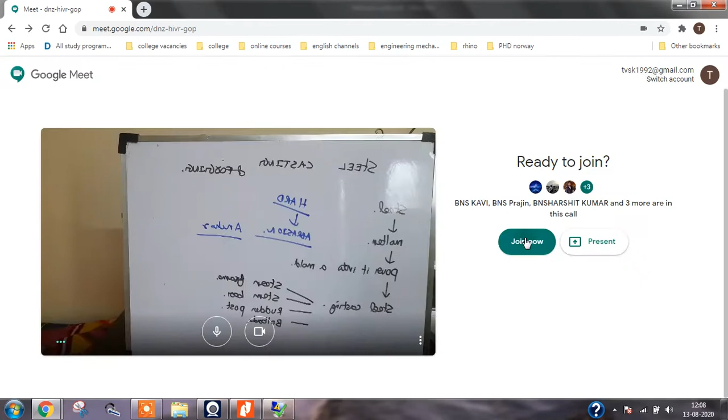Sir is not there. Ah, sir has come. Sorry, my computer got shut down.

Hello, the mic is off. Yes sir, okay, so my computer got shut down. That's fine, we'll continue.

One more place where we use steel casting is where the shape is complex, like the bulbous bow region or the aft end of the ship. The shape will be very complex like this, so you cannot go for normal plating. If you use normal plating, you have to take that plate for a bending machine, and if you bend the plate too much, a lot of internal stresses develop. So to avoid that, we go for casting.

So what is the difference between casting and forging? In casting, the metal is molten and it is poured into a mold, then it is cooled. In forging, we are doing hot forging work, we use a hammer to make it into shape.

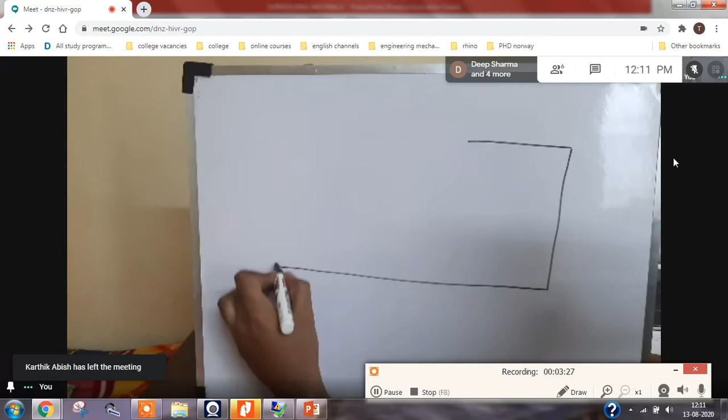In some places in the ship, the material needs to be very hard. For example, take a bulk carrier - this is a bulk carrier and this is the hatch opening. The grab crane is going to come down into this, say the cargo is here, this is the cargo. The grab crane is going to come and rub on the surface.

This plate is your inner bottom plate, inner bottom plating of the ship. The grab crane is going to come and take the cargo from here. The grab crane is made of metal steel, so it comes and rubs on the inner bottom plating. One or two times is fine, but if it happens 100 or 200 times, the material thickness keeps decreasing due to abrasion between the grab crane and the inner bottom. After some time, a dent or hole may form in this.

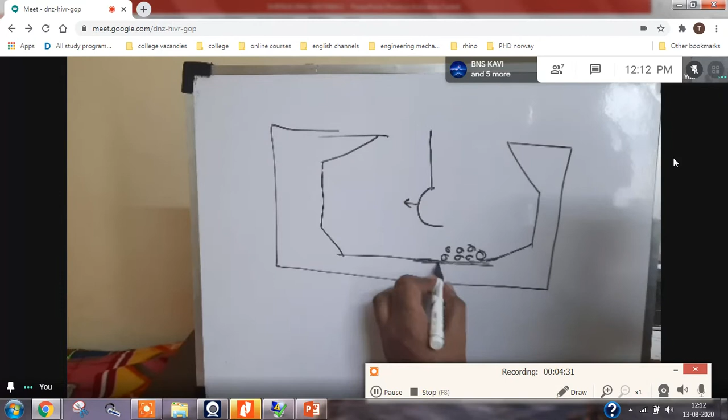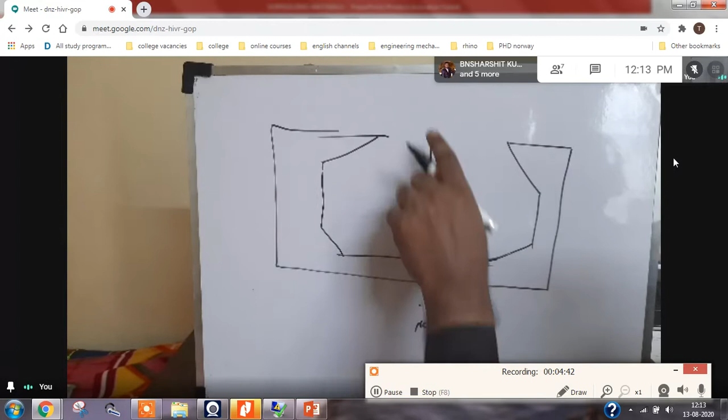To avoid that, we need to use a steel with good hardness, so we go for carbon manganese steel. Particularly for bulk carriers in the bottom, we go for carbon manganese steel. What is the disadvantage of carbon manganese steel? It is very prone to corrosion and the toughness is less, but the hardness and strength are very good. We increase the carbon content and use it in these places. So wherever you need hardness, we have to use carbon manganese steel with more carbon content.

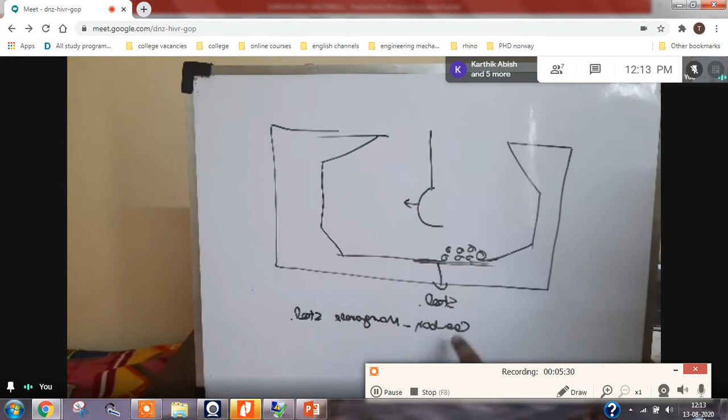So you have to think about which part of the ship undergoes which kind of stress. Based on the stress, if it is tensile or compressive stress, you go for high tensile steel. If it is going to undergo abrasion, you go for hardened steel, meaning steel with more carbon content. Clear?

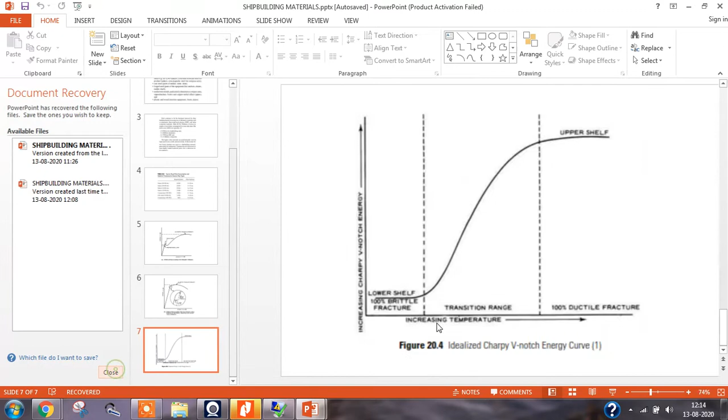Now there is one more topic - we'll go into the testing of steels. Before that, I'll give some more examples of where these steel materials are used.

If we take stainless steels - stainless steels are very costly because the chromium content in stainless steel starts from around 15% to 30%. The chromium content is very high, and the price of chromium is very high compared to steel and other metals, so the price of stainless steel is more. So what we do is we don't use it in a big structure like a ship. Even though it has good corrosion resistance property, we cannot use it in ships because the price is very high.

So what we do is we take a normal mild steel plate, and on top of that, we coat it with stainless steel. This is stainless steel coating.

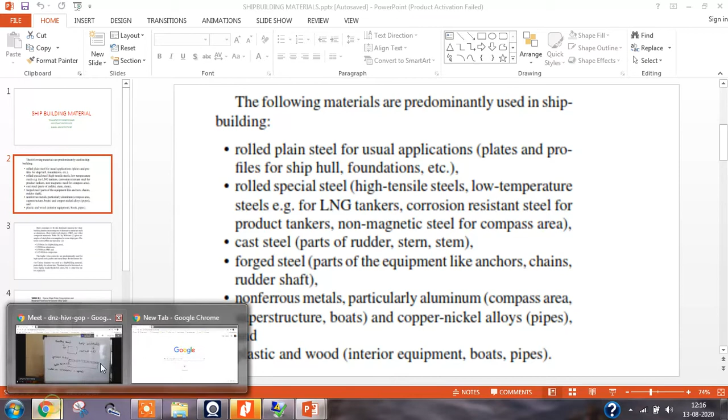This is stainless steel coating, and this one is mild steel. You'll find these kinds of plates in ships, in specific places where corrosion is very dangerous. Take a tanker ship carrying cargo which is more corrosive in nature - the tank plating should be coated with stainless steel. Suppose you take crude oil in an oil tanker, the inside walls of the cargo tank will be coated with stainless steel. So this is one application.

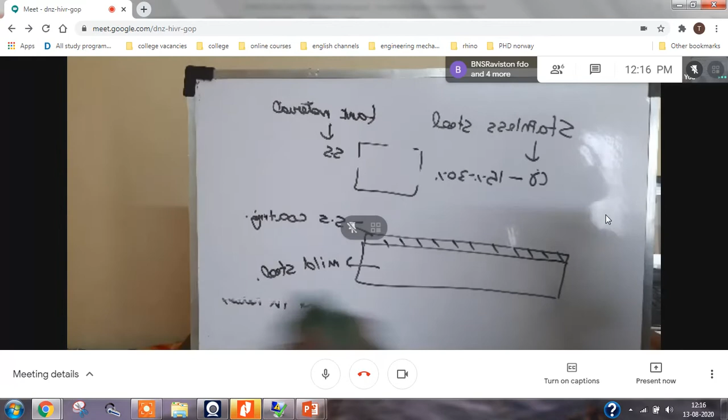Then one more topic we have in this chapter: testing of materials. When the steel comes from the steel plant to the shipyard, there may be a surveyor coming from the classification society, and he will be testing the material to check whether the mechanical properties are according to the classification society requirements and rules. Only then will you give approval, and only then can you use that material in the ships.

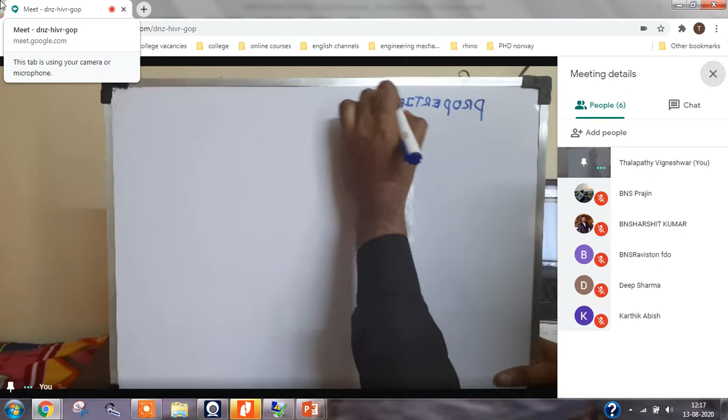So what are the normal properties he is going to check, and which properties are more important? He is going to check the strength first. Properties of steel - he is going to check the strength. Strength means there are two parameters: the yield stress value, and ultimate tensile stress.

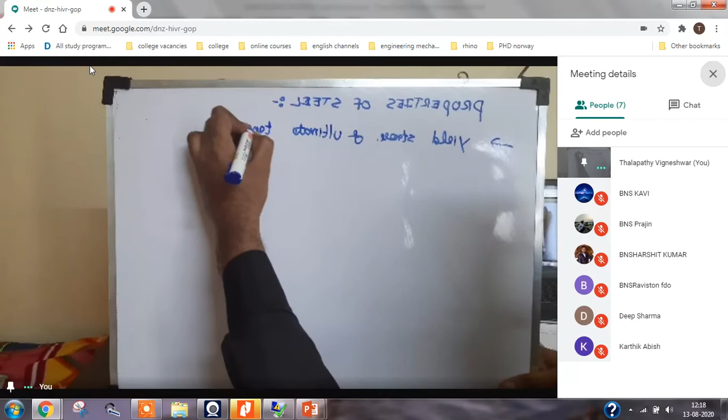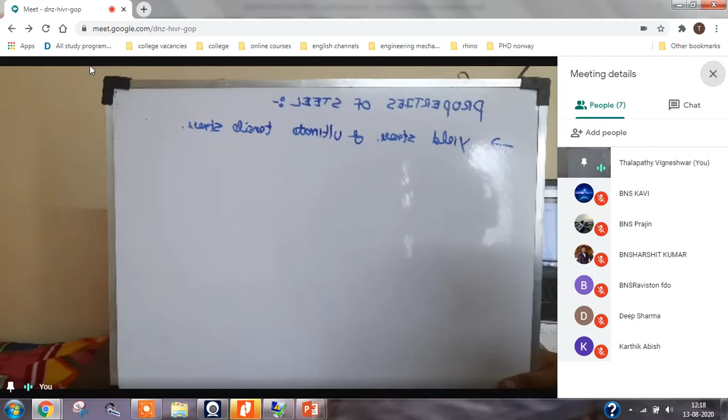Ultimate tensile stress - you're going to check this. What is stress actually? Stress is the ability of material to withstand a force.

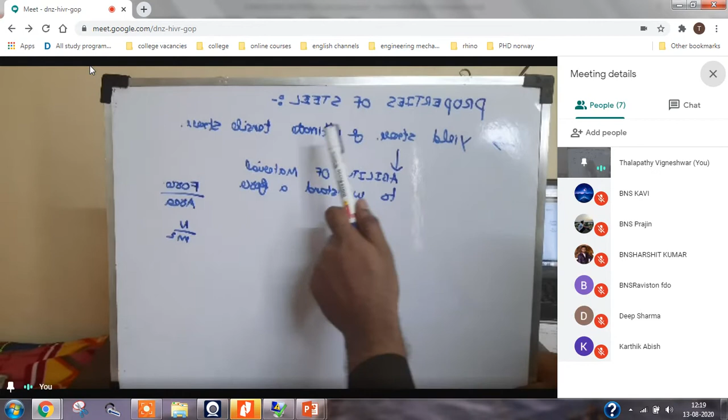What is the formula for stress? Force by area. Force by area, you can write as Newton per meter square. This is the formula for stress. Now, by looking at the value of yield stress and ultimate tensile stress, we can understand what kind of forces this material can withstand, how much force this material can withstand.

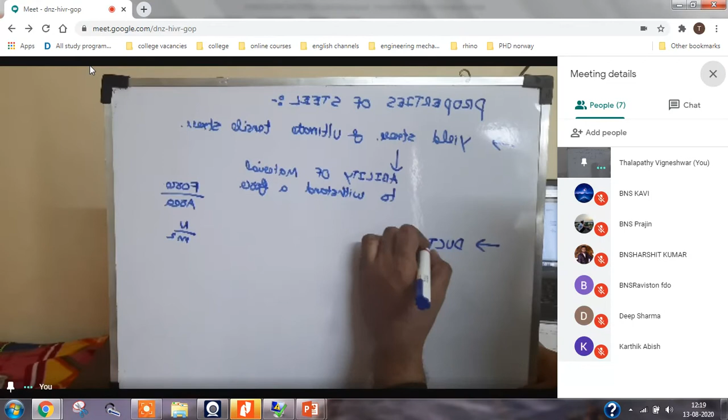The next important property is ductility - or before that, toughness. Next important is ductility. If the metal has good ductility, you can convert that metal into any shape. You can change the form of the metal easily. It is easy to bend, easy to elongate, easy to compress the metal. So all this is possible only if it is ductile.

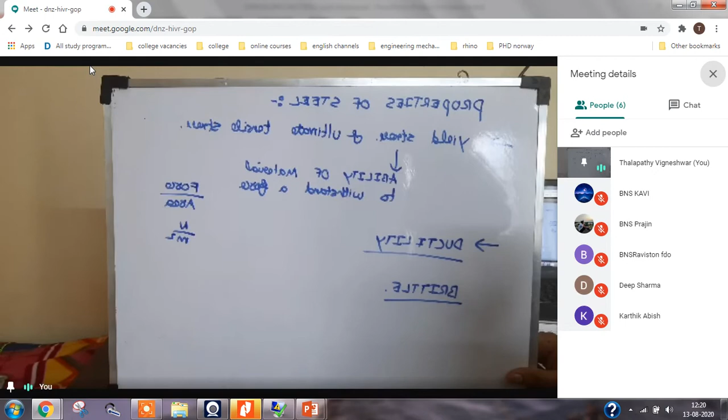Opposite of ductility is what? What is opposite of ductile? Brittle. Opposite of ductile is brittle. So when a force is given on a brittle material, what happens? The material will crack, the structure will crack and it will break. What about ductile structure? Ductile structure will deform.

Ductility means what? Ability to deform. Deform in the sense it can elongate - elongate means increase in size. It can elongate, it can compress, it can get compressed, it can change in size - change in shape. So all this is possible if the metal has ductility. So ductility is a very important factor.

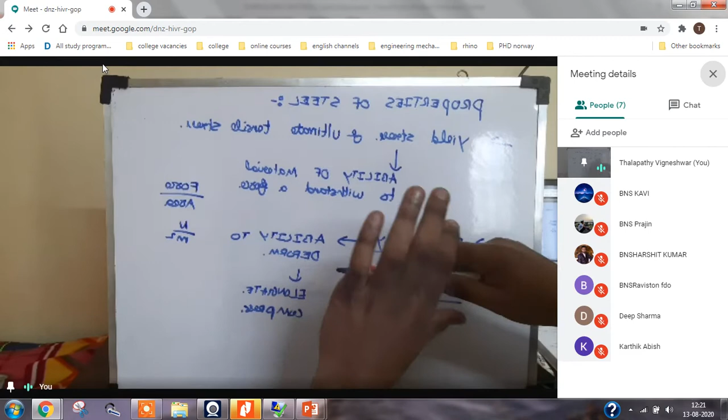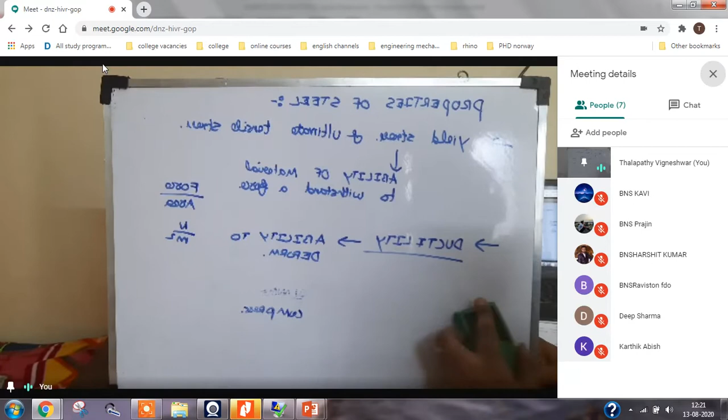If ductility is very less for a steel, what happens? If you are applying a force, it is not going to deform - it is going to immediately fail. Deform in the sense, suppose a rubber band is there and you are pulling it - what happens? It will be deforming, increasing in size, and after some point of time it will break. There is some limit in which it is elongating, and after that only it is breaking. But what about brittle material? When you give a force, immediately it will break. So that is brittle material. The second point is ductility, ability to deform.

Then the third point is notch toughness.

Toughness is in between brittleness and softness. If you give force on a brittle material like a stone and hit it with a hammer, cracks will develop immediately. But if you hit a soft material like aluminum with a hammer, it is very soft and cracks will not develop. Toughness is in between the brittleness and the softness.

If the material is having good toughness, if the material is having good notch toughness, then cracks will not develop. So notch toughness is very important for fatigue deformation and for fracture deformation. Cracks will not develop if the notch toughness is good.

Understood? So which steel is having good notch toughness - carbon manganese steel or high tensile steel? When the carbon content is increasing, notch toughness will decrease. We have seen this yesterday, right? If the carbon content is increasing, notch toughness will decrease.

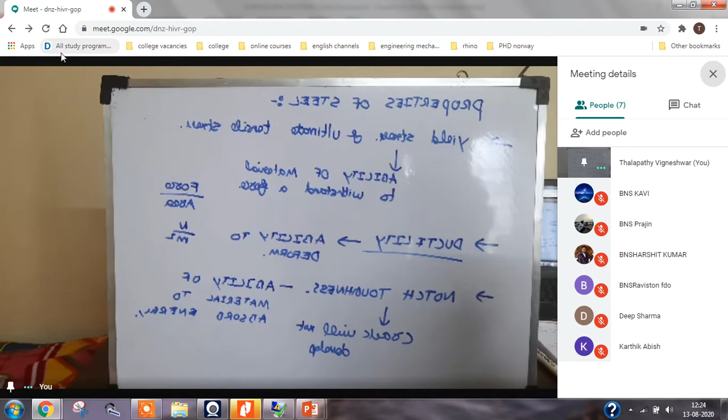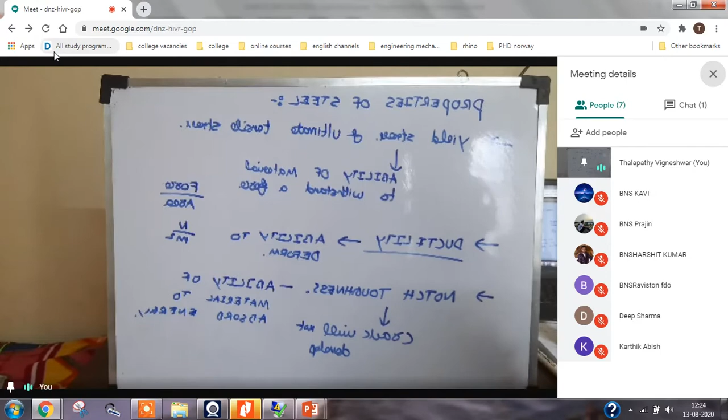Understood? Have you noted this? Okay. One more point is hardness.

Can someone give some examples - which part of the ship is hardness very important for? For which part of the ship is notch toughness important? For which part of the ship is hardness important? For which part of the ship is strength important? Try. What about the inner bottom of bulk carrier - is strength important or hardness important?

The inner bottom of bulk carrier - the grab crane is going to come and rub it, like a JCB that comes and scoops mud. The grab is going to come and rub the inner bottom steel. So what will happen here? Abrasion will take place. So which is important for inner bottom plating? It is not strength, it is hardness.

Okay, then what about the midship region - the deck plating, the bottom plating? What is very important in the midship region? Strength is important, sir. Toughness. Why? Because of hogging and sagging deformation.

Because of hogging and sagging deformation, huge bending stress acts in these places - midship region, deck, and bottom. So what is important for them? For them, strength is important. You have to choose a material with good yield strength and tensile strength.

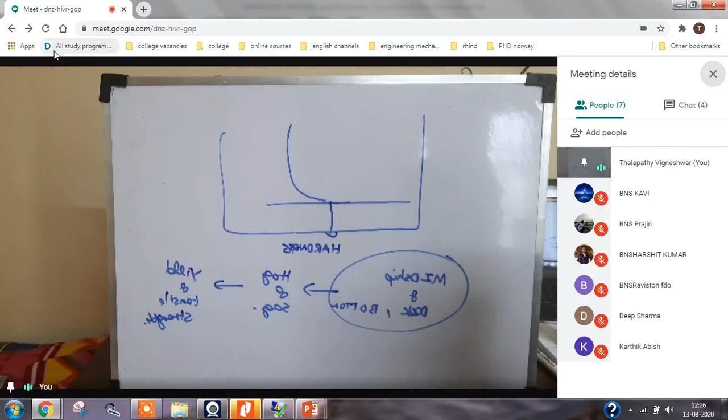You have to choose a material with good yield strength and tensile strength. Understood? Ductility is also very important because they have to expand, elongate, and should not fail immediately. And what about notch toughness?

Which part of the ship is notch toughness very important for? Always remember the failure is going to take place in the weld region. Suppose there are two plates you are welding together - in the weld region only, the fracture is going to take place. So notch toughness is important for the weld area, especially in places of high stress concentration.

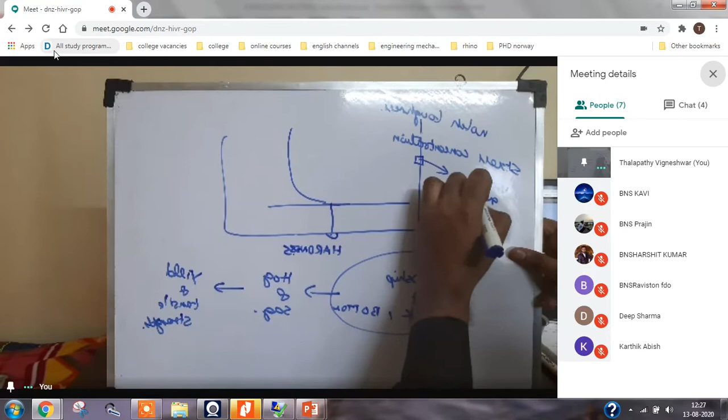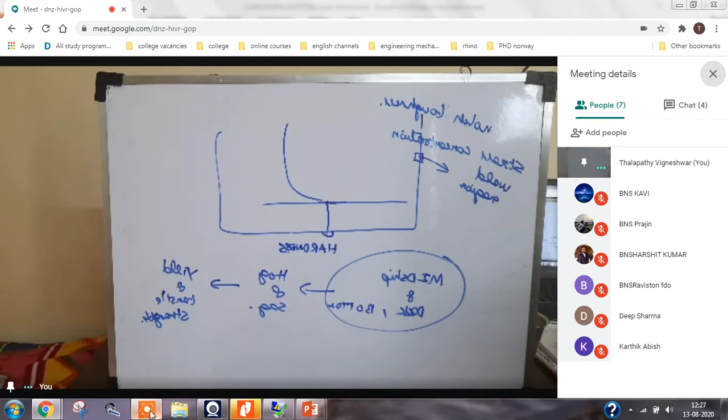Notch toughness is an important parameter in high stress concentration places. I will discuss this later. High stress concentration places, mainly in the weld region - in these places, notch toughness is the important parameter. Understood? Can I wrap this up?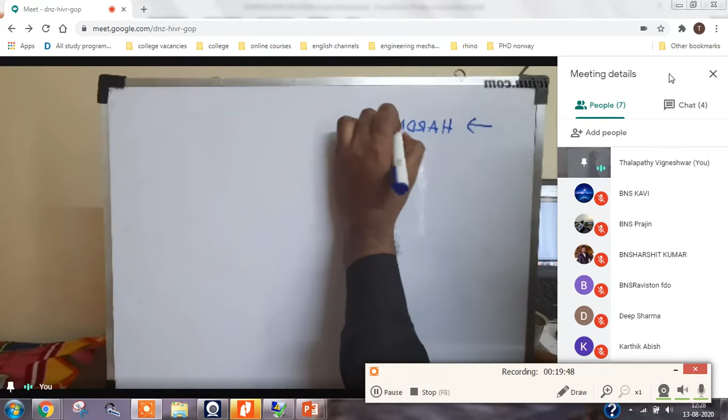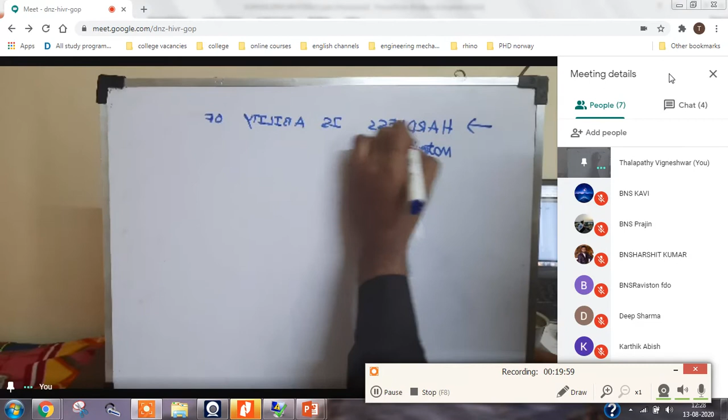Then what is hardness? Hardness is the ability of material to resist abrasion. Clear?

Then we are going to the topic of material testing. I'll present you one video - you watch that video and try to understand what is tensile testing.

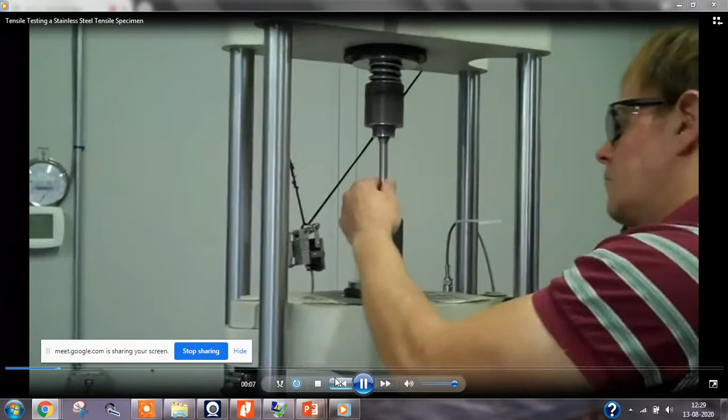Tensile test we are doing for calculating the yield stress value and for calculating the ultimate stress value. Tensile test, with a 0.500 diameter tensile specimen.

Can you hear the audio of the video? Stainless steel material - no, sir. No, okay, in Google Meet we cannot hear the audio. Okay fine, you can listen.

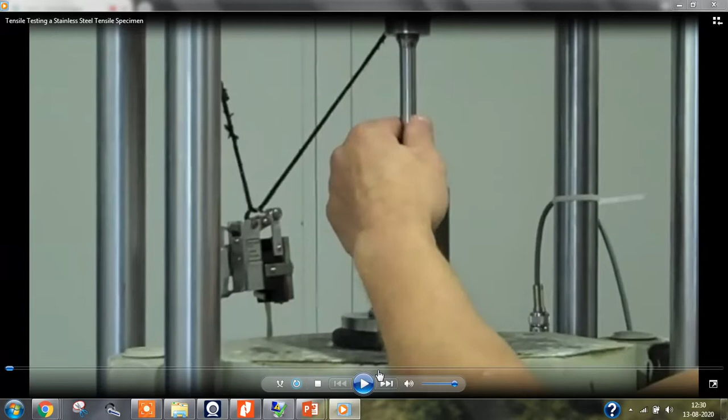So where they do the tensile test is in a machine called universal testing machine. This universal testing machine has two parts. These parts can come closer to each other or they can go away from each other.

What they're going to do is take a test specimen. Test specimen means a small piece of metal. They're going to take a small piece of material and fit it in the top and bottom.

When they want to conduct the tensile test, they will move this far away. The top part will go up. So what will happen? The material will get elongated and it will break. When they are breaking, they will calculate the ultimate tensile stress.

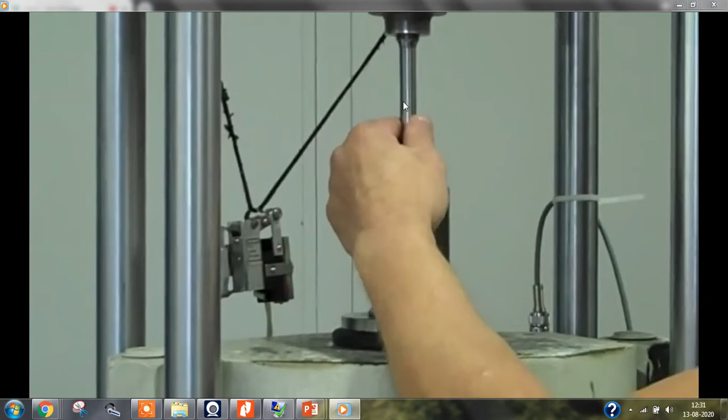They will calculate the yield stress values. Everything they will calculate. You watch it, I will explain it clearly.

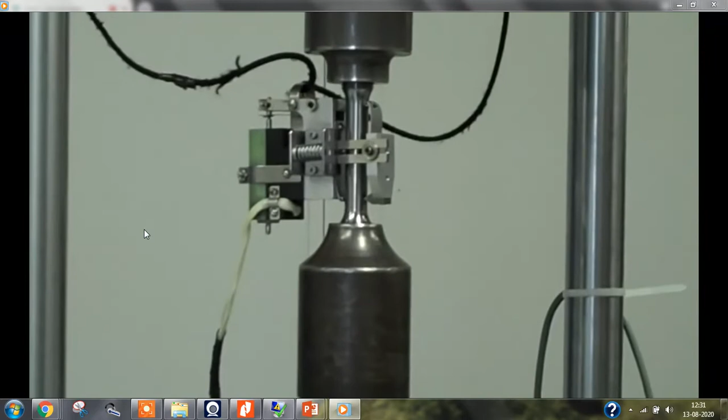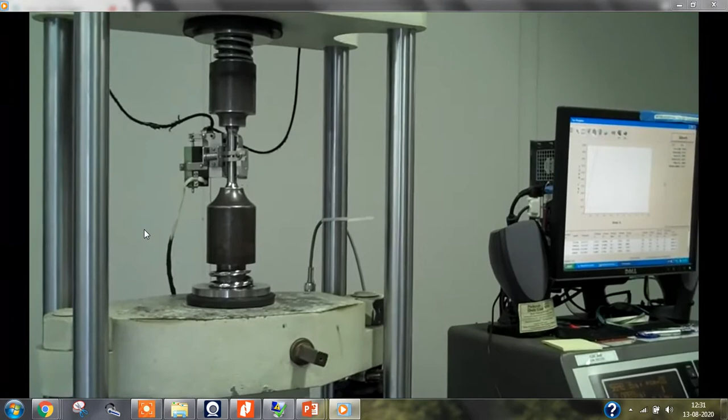Conducting tensile test on a 0.500 diameter tensile specimen of stainless steel material. Engage the tensile specimen between crossheads. Apply an extensometer to determine the yield strength of the material. After yield strength has been determined, remove the extensometer and continue the test to failure.

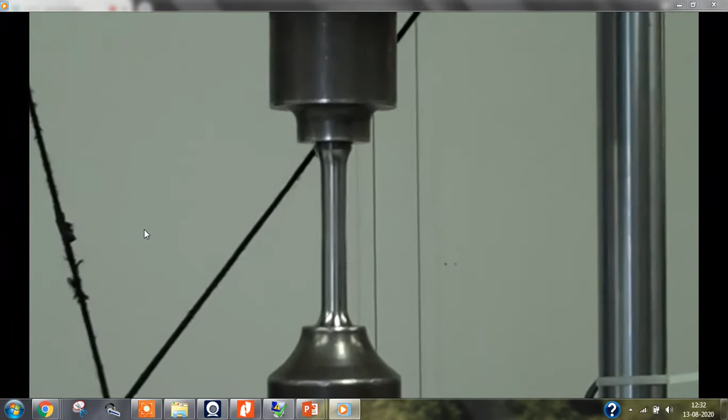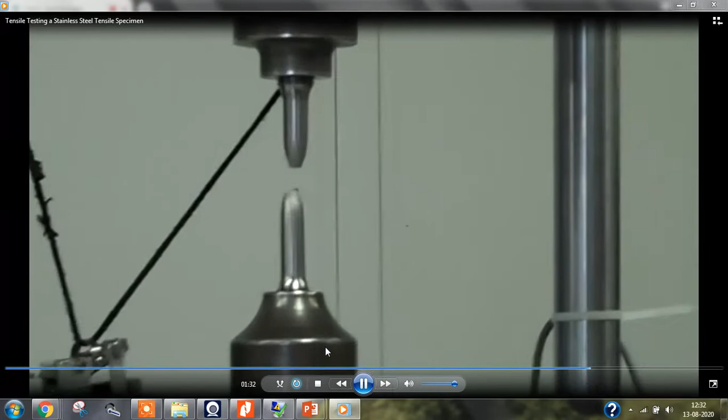Now they are giving a tension force. It is elongating. Can you see the geometry is reducing here? Slowly the length is increasing and it got broken.

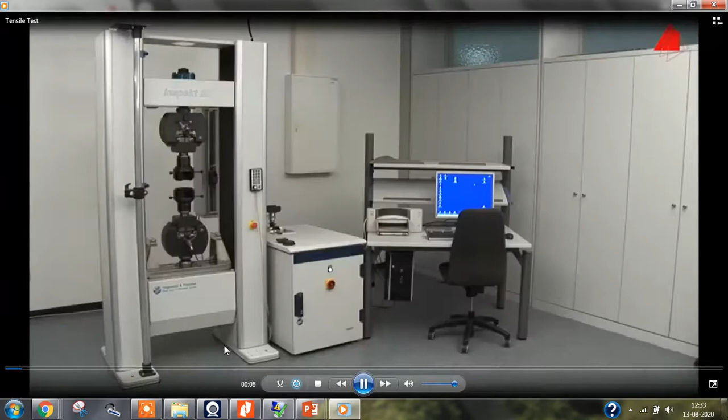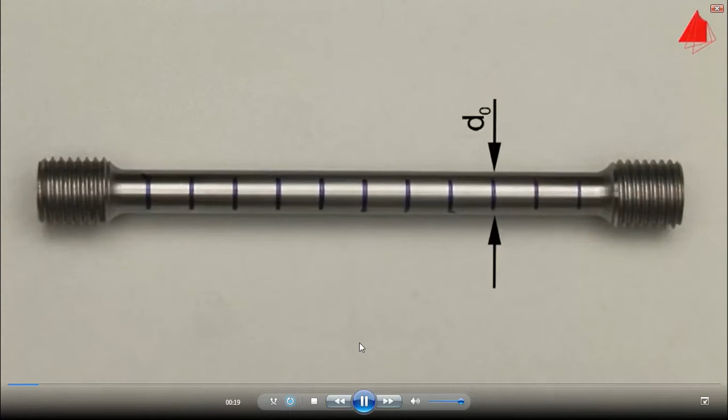The tensile test, first test, material with yield point phenomenon. In the first tensile test, a plain carbon steel with yield point phenomenon is to be tested. This is the test piece. It has a cylindrical test region with an original diameter of 10 mm. This is the test specimen and you call this the gauge length.

So what they do is, after applying tensile force, this will expand, extend, elongate, and it will fail. It will go out of the elastic limit and it will break.

After breaking, they will test the length again and measure it. They will find out before the test what is the length, and after the test what is the length. From that, they will find the elongation.

This is a cylindrical rod, and they can measure the cross section area also. Before the test, what is the cross section area? After the test, what is the cross section area? They can find the change also.

And an original gauge length of 100 mm. Within this test region, distance marks have been drawn at regular intervals. They help to visualize and measure the plastic behavior of the specimen.

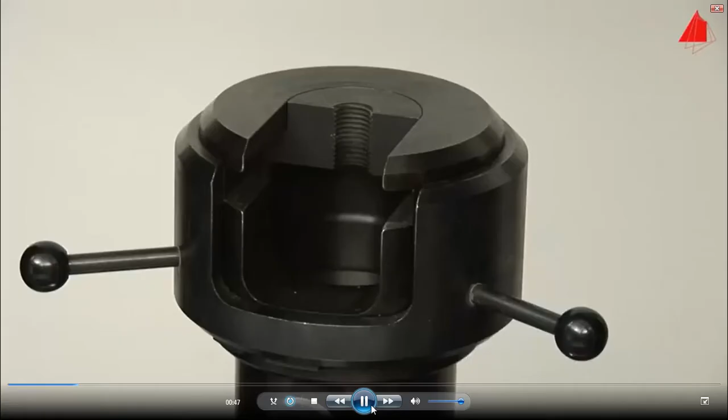Using a hand control, the tester moves the upper crosshead into its correct starting position. Now he can place the threaded ends of the test piece in the grips. Can you see this? This portion can go up and now down.

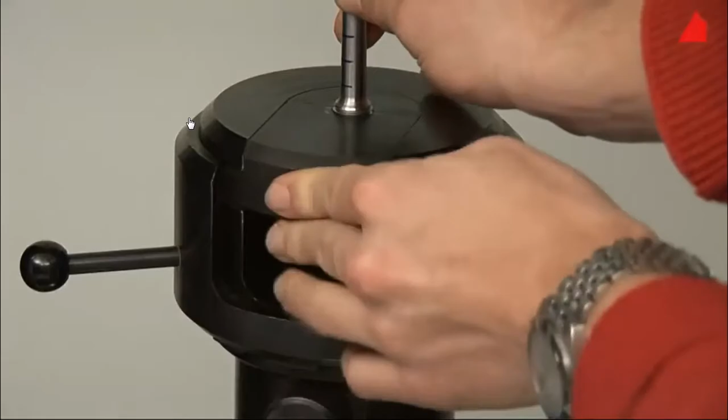He can place the threaded ends of the test piece in the lower and upper grips of the tensile testing machine. If it goes up, there will be tensile force. If it goes down, there will be compressive force on the test specimen. This is how you fix it.

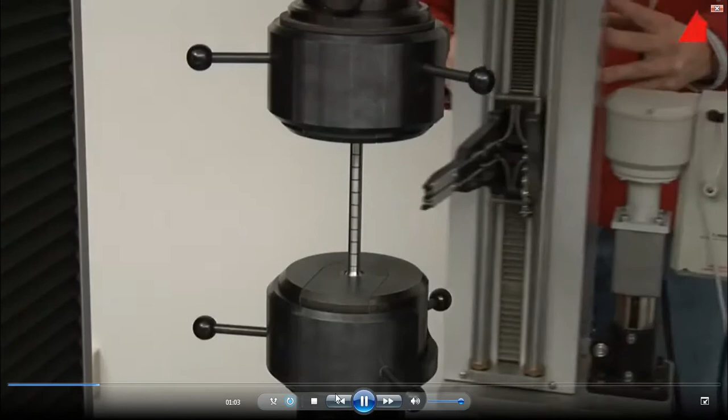You lock it. In the next step, he swings the extensometer into its working position and checks that everything is correctly prepared. Then he selects all necessary testing parameters on the control computer.

Ready. The test starts and the extensometer's sensor arms are carefully pressed onto the test piece. This way, the gauge length can be measured throughout the whole tensile test. The gauge length is displayed at the bottom right-hand corner of the screen. At the beginning, it amounts to 100 millimeters.

Gauge length means what? The length of the test specimen. Before conducting the experiment, what is the gauge length? It is showing in the computer.

During the tensile test, the test piece is slowly and constantly elongated with a standardized speed. Now in the test, what are they going to do? They are going to slowly elongate this. The upper fixture will go up. They are giving a constant force.

The force that the test piece opposes to the imposed elongation is recorded and can be seen at the bottom left-hand corner of the computer display. The material behavior can best be observed in a force-elongation diagram.

Now this rod is being elongated, and you can see in the machine how much is the elongation. Slowly the elongation is taking place.

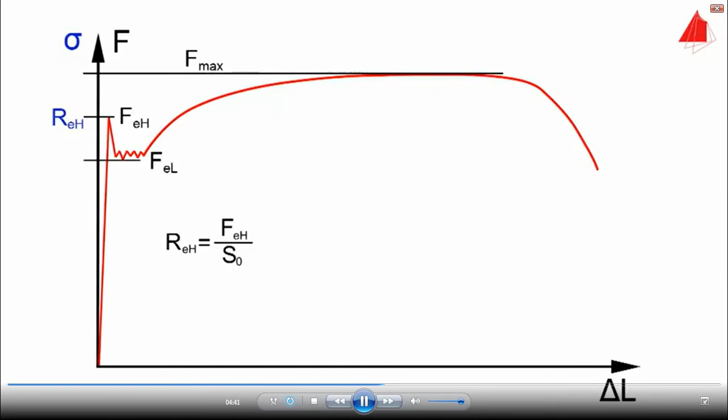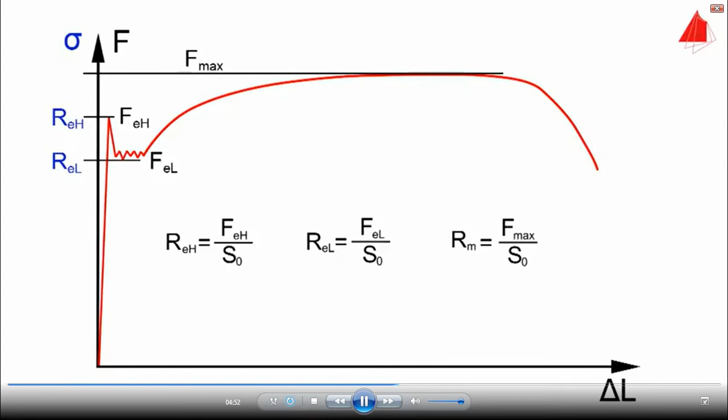Using these forces, the strength properties of materials can be calculated. The upper yield strength REH is calculated by dividing the force FEH by the original cross-sectional area S0. The lower yield strength REL is defined in a similar way. The maximum force divided by the original cross-sectional area is called tensile strength RM.

In the last step, the tester swings the extensometer back into its resting position and removes the broken test piece. On the work table, he puts the fragments back together again. With the help of the distance marks, the percentage elongation after fracture can be determined.

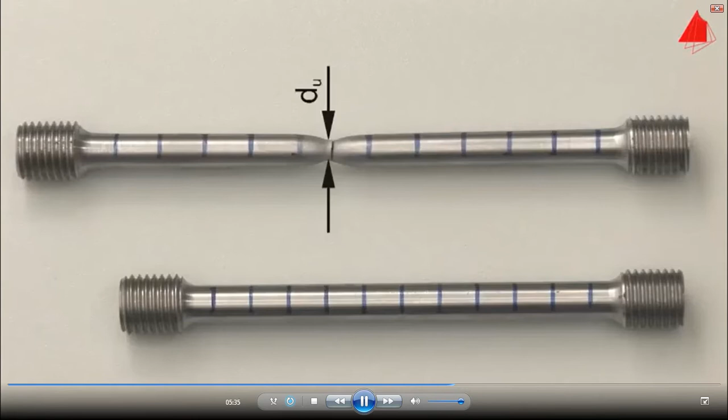This is the permanent strain after fracture and amounts to about 30% in this example. Please note that the percentage elongation after fracture depends on the length to diameter ratio. By measuring the smallest diameter at the point of fracture, the percentage reduction of area can be calculated. It describes the reduction of cross-sectional area at the point of fracture in relation to the original cross-sectional area.

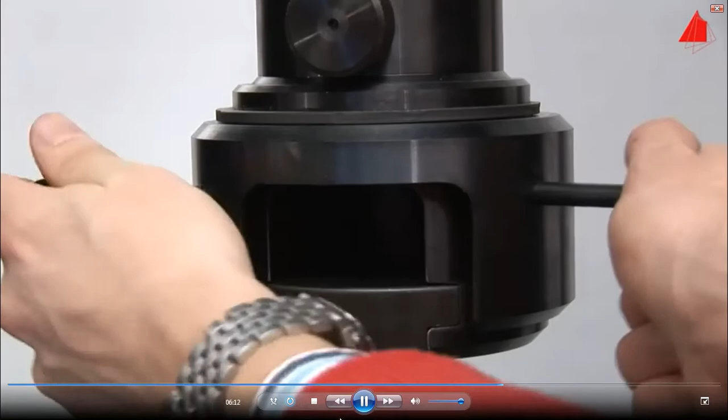In the second tensile test, a material without yield point phenomenon is to be tested. In this case, it is a precipitation-strengthened aluminium alloy. The test piece has exactly the same shape and dimensions as the specimen in the first test. It is cylindrical, with an original diameter of 10 mm and an original gauge length of 100 mm.

After fitting the test piece into the testing machine and panning the extensometer into its working position, the test can start. The initial linear curve in the force elongation diagram again shows the elastic behavior of the material.

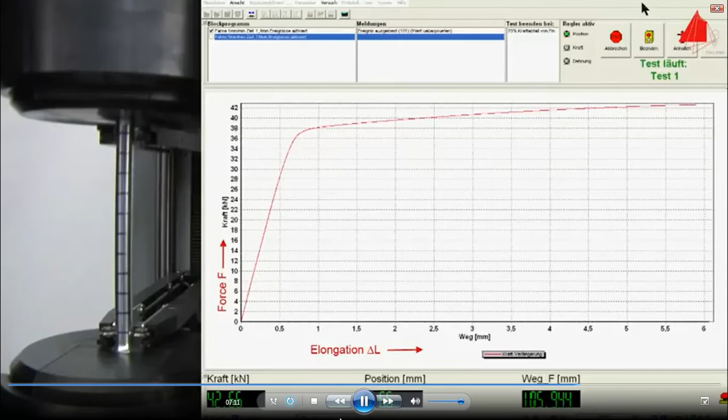But this time, the end of the elastic area is not revealed by a sudden drop of force or any distinct change. There is a smooth and gradual transition from linear elastic behavior to plastic deformation. In the further course of the tensile test, the force increases and the test piece again is strained uniformly along its length. At the point of maximum force, a neck develops, and all subsequent plastic deformation is confined to this neck until fracture finally occurs there.

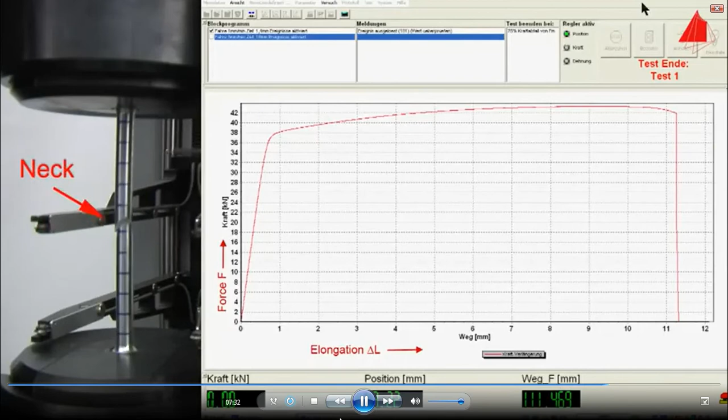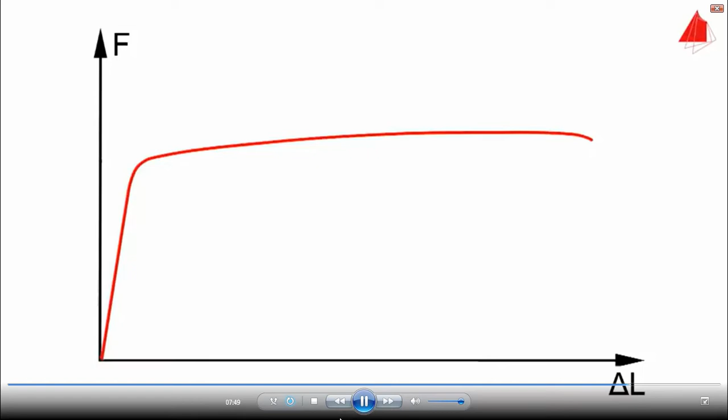As a common substitute for the yield strength, the 0.2% proof strength is used. It is the stress that causes 0.2% of plastic deformation in the material. And this is the way to calculate it. First of all, the elongation that corresponds to 0.2% of strain has to be computed. For an initial gauge length of 100 mm, the result is 0.2 mm.

In the force elongation diagram, a straight line parallel to the elastic line is drawn through the offset point of 0.2 mm of elongation. The force at the intersection point of the offset line with the force elongation diagram is designated as Fp 0.2. This is the force that causes a plastic strain of 0.2%. The 0.2% proof strength, Rp 0.2, is equal to Fp 0.2 divided by the original cross-sectional area S0.

Tensile strength, percentage elongation after fracture, and percentage reduction of area are calculated in the same way as in the first test.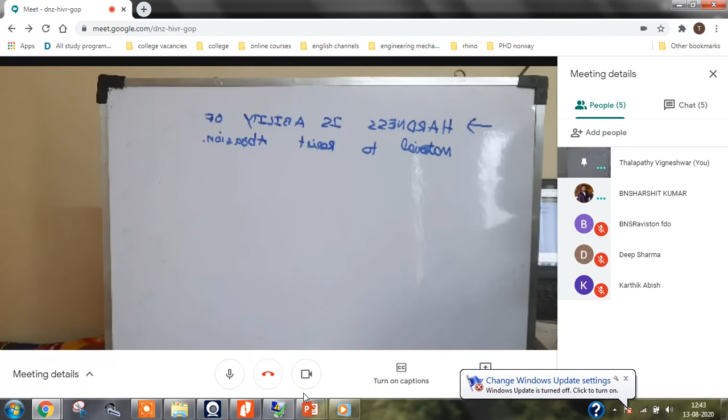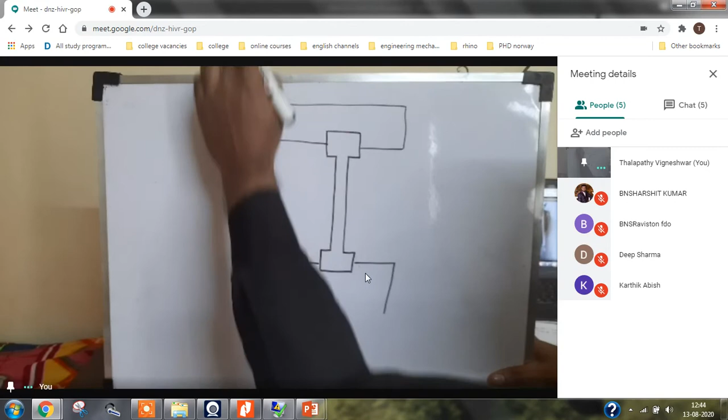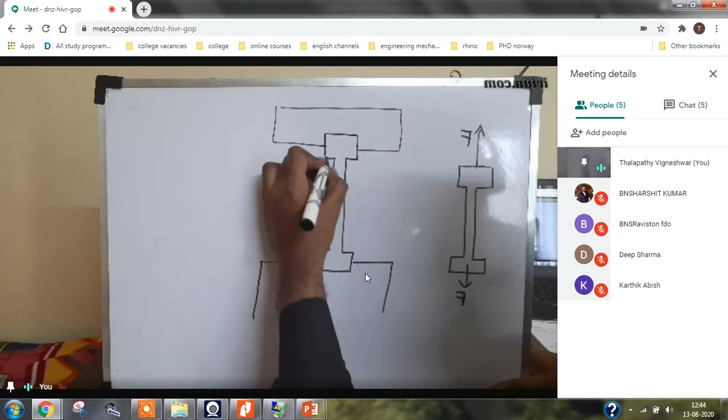Hello? The tensile test. Yes, sir. First test, okay, can you see the board? Yes, sir. What about the others, where did they go? Only 4 are there, the timing. Okay, okay, 5 minutes, okay. You're hungry? Yes, sir. You're feeling hungry? No, sir. Okay, this is the test specimen. On top they are fixing it, fixing it and putting a lock. And bottom also they are fixing it and putting a lock. This bottom is not going to go up and down. Okay, the top portion is going to go up. If it goes up, what will happen? On the material, what will happen? This is the specimen, no? So on the specimen, what happens? Tensile force will act. Tensile force will act on the specimen. Okay, that means elongation force. So what happens, this is the gauge length. Okay, from here to here we are measuring the length. This is the initial length, gauge length.

Now when tensile force is applied, this will be expanding. When a force is given, stress will develop on this material. For some point of time, the stress is directly proportional to the tensile force, or you can say the stress is directly proportional to the strain.

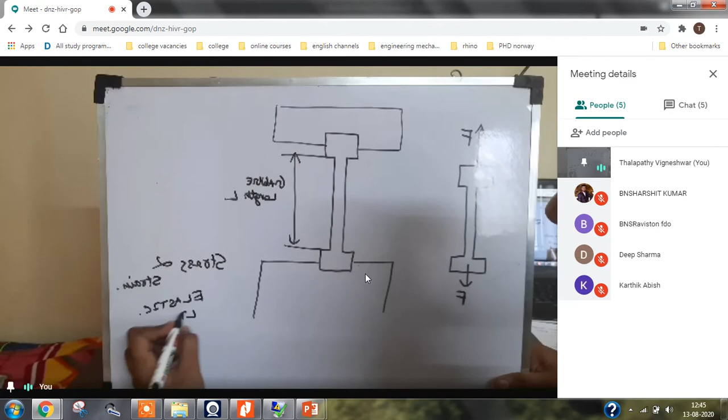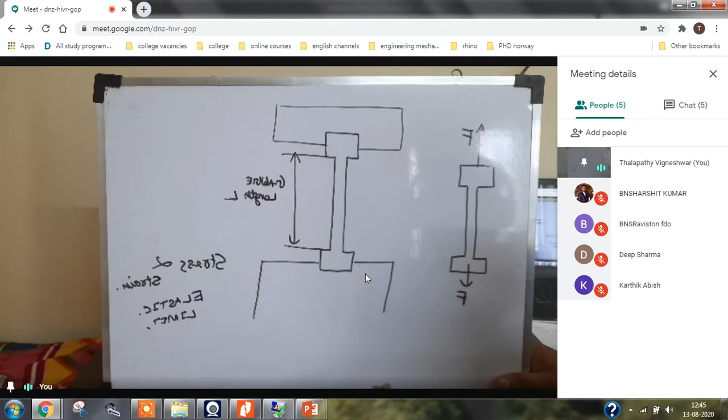If the stress is directly proportional to strain, then the material is in elastic limit. If the stress is not proportional to strain, then the material goes to the plastic limit, the plastic deformation zone.

Directly proportional means it will go like a line. If the stress and the strain are directly proportional, when the tension force is increasing, it will go like a line. At some point of time, the proportionality is not there. The stress is not proportional to strain. So what happens? The strain will be increasing without increasing stress.

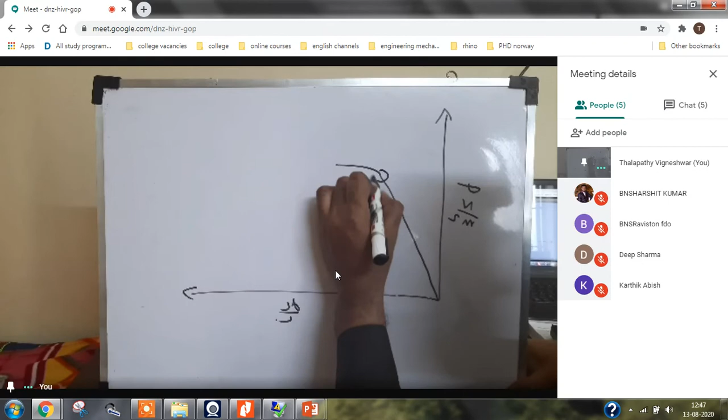So you need to find this point, at which, without increasing stress, the strain is increasing. That point is called yield point.

I'll repeat again: a point on the stress strain curve where the strain is increasing without increasing stress value. Stress means it should go up, strain means it should go towards right. So strain is increasing without increase in stress. This point is called yield point.

After that, after some elongation, again the stress will increase and strain will also increase. It will be increasing, and at some point of time the material will break. Material breaks means the stress will become zero, it goes like this. So this point is called breaking point, the ultimate strength point.

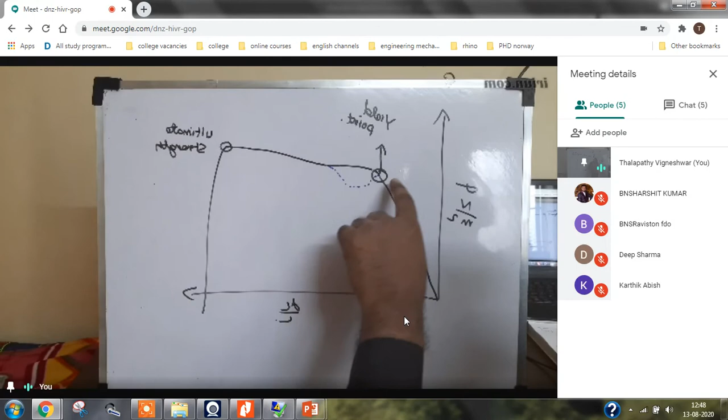So they compared a normal steel and a high tensile steel. In normal steel, there is a clear distinction of the yield point. I'll draw that. After the yield point, the value of stress will decrease a little bit, then again it will increase.

But in high tensile steel and aluminum, there is no such decrease and increase, it is going straight. There is a difference they show. So these two points, the yield stress value and ultimate stress value - how to find the yield stress? This is the value of yield stress, sigma. This is the yield stress and this is the ultimate stress.

And this is the maximum elongation that is possible in elastic limit. When the material is expanding after this, that means it is going into plastic zone, it is going into deformation zone.

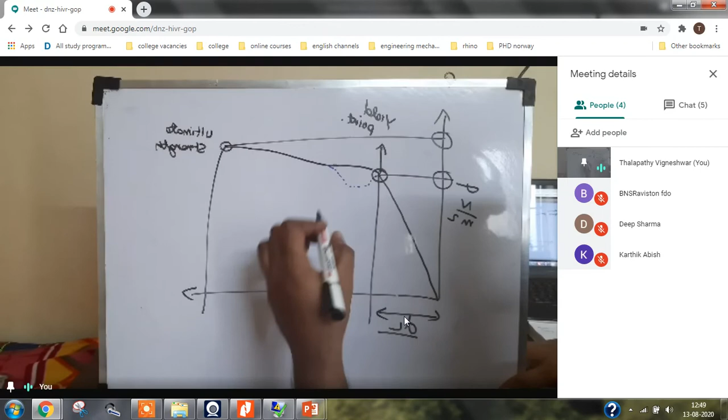What is plastic zone? If the material is going into plastic zone, that means it will not come back to the original position. It will be in the deformed state only. See, elastic limit and plastic limit.

I will give some example. You take a plate, you are applying a tensile force. Let's say it is 1 meter, it is increasing, the length is increasing to 1.2 meters. That is 20% expansion, and it is in elastic limit. Once the force is taken out, this will again come back to 1 meter.

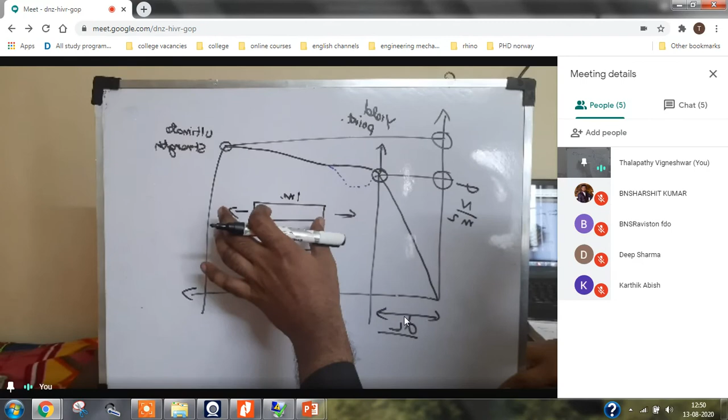But say it is going to 1.3 meters, that means it is in a plastic zone. After the yield point, it is going to 1.3 meters. So now what happens? After this force is removed, it will stay at the same 1.3 meters. So it will come back to original condition only until it expands to 1.2 meters, that is 20% elongation. Till the yield point, it can come back to the original condition. After the yield point, it goes into the deformation stage.

And at some point of time, it is going to break. The value of stress at which the failure is taking place is called ultimate tensile stress. The point up to which the stress and strain are proportional is called yield point. This is called stress strain diagram.

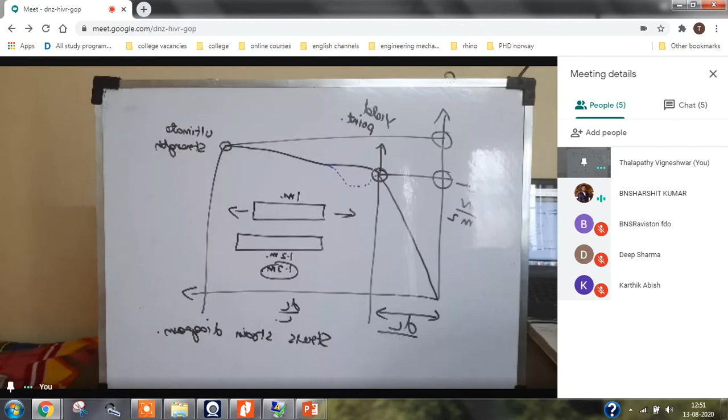Any doubt on this? No, sir. Okay. No, sir. Thank you.